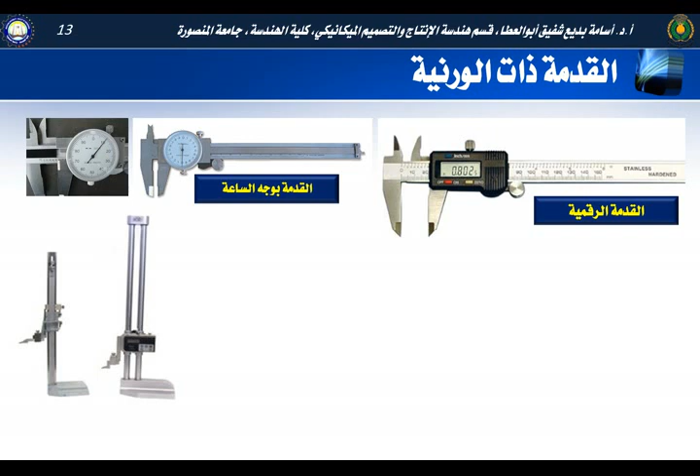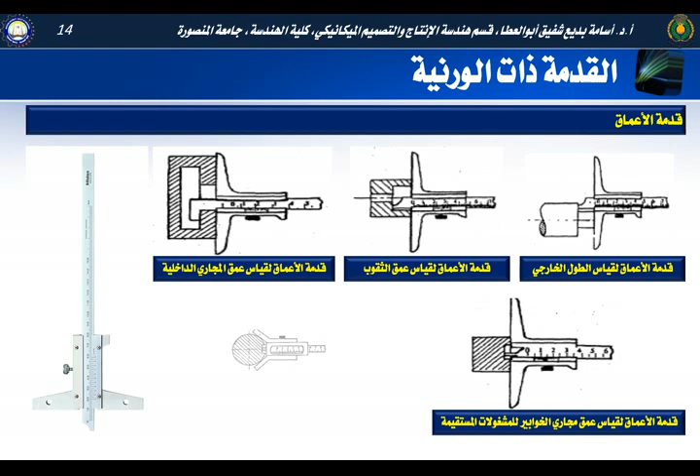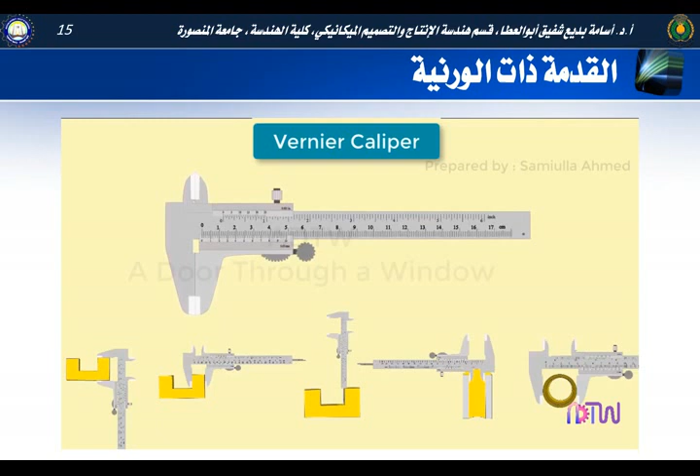Vernier caliper. In this video we will learn about vernier caliper. It is a measuring instrument which can be used to measure height, thickness, depth, and internal and external diameters of various components. It works on the principle of difference in two scales.

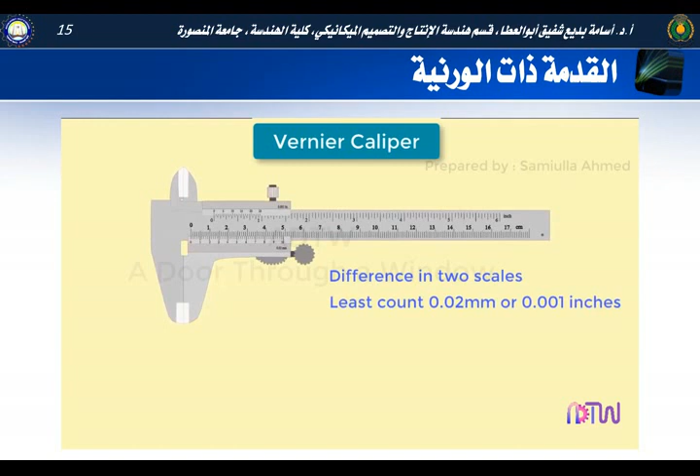It can measure dimensions accurately up to 0.02 mm or 0.001 inches, which is the least count of the vernier caliper. Let us see its various parts in detail.

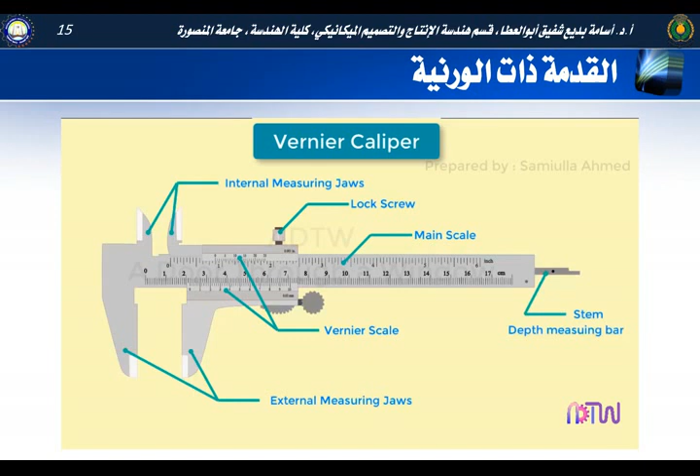It has a main scale, vernier scale, external measuring jaws, internal measuring jaws, lock screw, and depth measuring bar. The main scale has markings engraved on it: on top the markings are in inches, and on the bottom they are in mm.

The vernier scale has markings on top and bottom. The top scale is for taking readings in inches, and the bottom scale is for taking readings in millimeters.

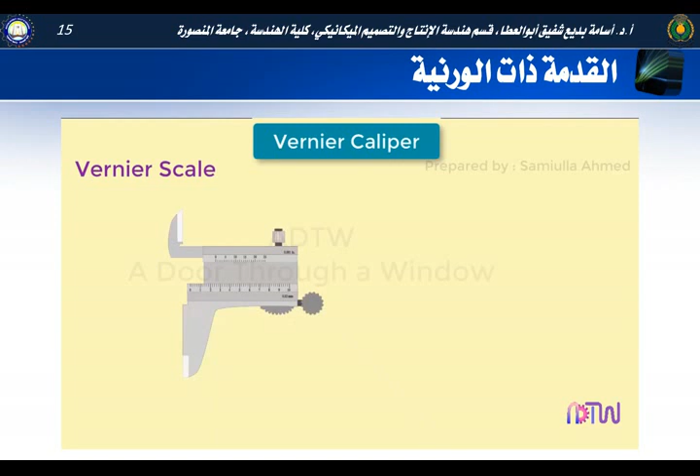There are two types of vernier scales: forward vernier and backward vernier. If on the bottom there are 50 divisions whose total length equals the length of 49 divisions on the main scale, this is called forward vernier. On the other hand, if 50 divisions on the vernier scale equal 51 divisions on the main scale, such a vernier is called backward vernier.

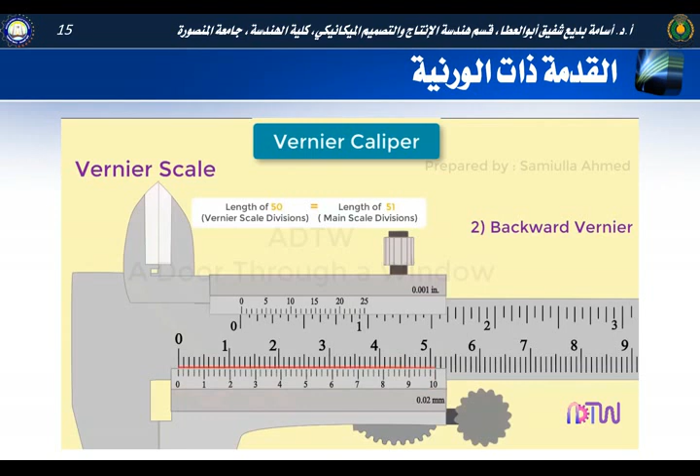In this video we will discuss the forward vernier.

External measuring jaws: there is a fixed jaw which is part of the main scale, and a sliding jaw which is attached to the vernier scale. It is called sliding jaw because it slides with the vernier scale. These jaws are used for measuring external dimensions, such as outer diameter, length, and thickness of components.

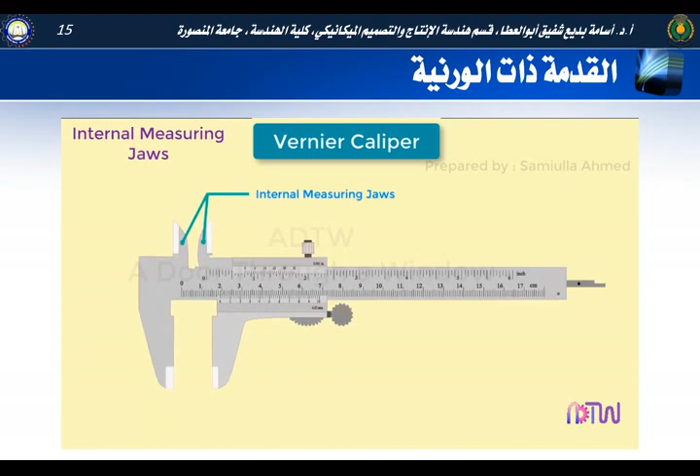Internal measuring jaws: here also there is a fixed and a sliding jaw. These jaws are used for measuring internal dimensions, such as inner diameter, slot dimensions, and distance between two parallel surfaces.

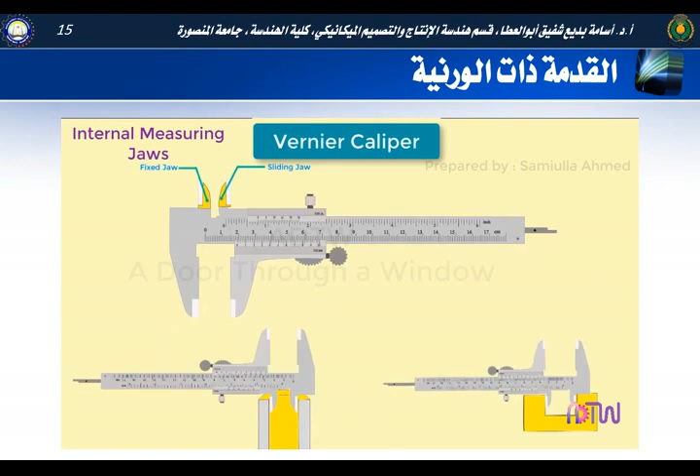Lock screw: on top of the vernier scale there is one lock screw, which helps in clamping the movable jaw in a particular position after the jaws have been set accurately over the job being measured. This arrests further motion of the movable jaw so the operator can note down the reading in a convenient position.

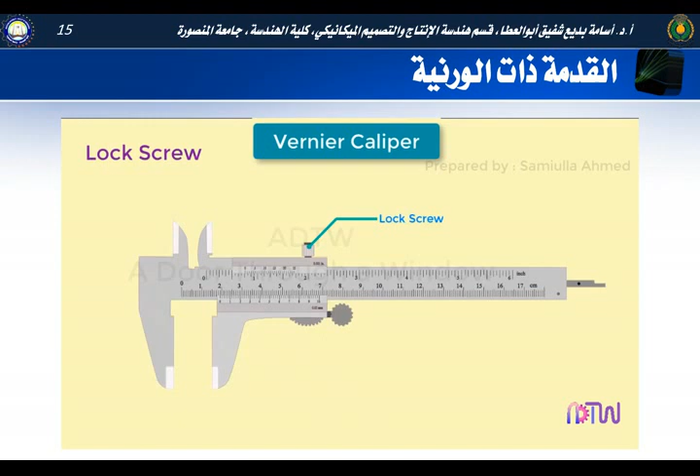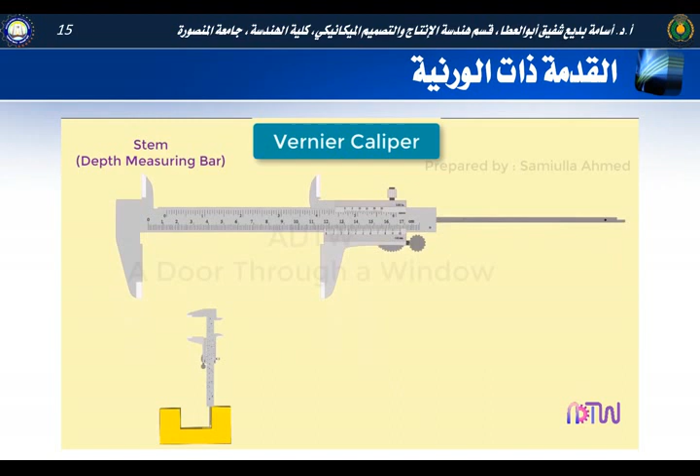Whenever the vernier slides over the main frame, a depth measuring blade also slides in and out of the beam of the caliper. This is a useful attachment for measuring depth to a high degree of accuracy.

Now let us see how the least count of the vernier instrument is calculated. As we are discussing the forward vernier scale caliper, we know that 50 divisions on the vernier scale equal 49 divisions on the main scale. Equating both.

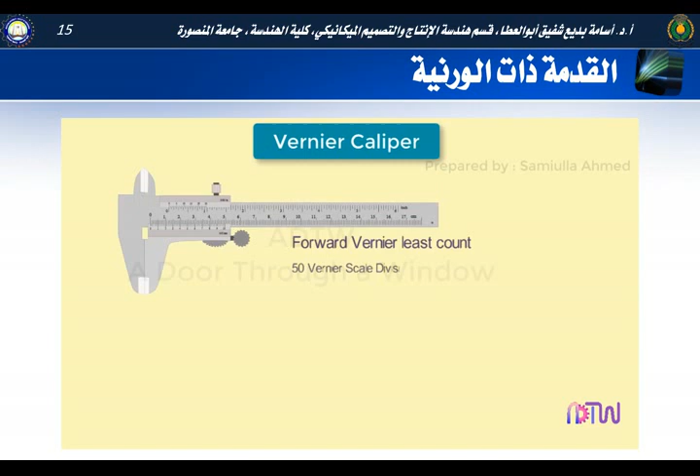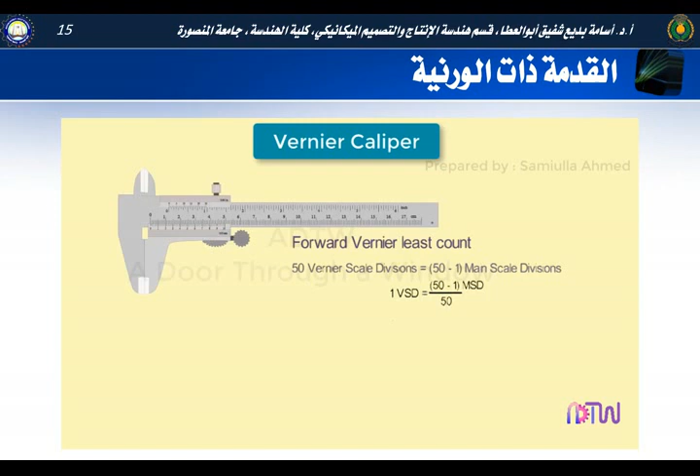50 vernier scale divisions equal 50 minus 1 main scale divisions. Therefore, 1 vernier scale division equals 50 minus 1 divided by 50, which equals 49 divided by 50 millimeters. Therefore, the least count equals 1 main scale division minus 1 vernier scale division, which equals 1 minus 49 divided by 50 millimeters, which equals 0.02 millimeters.

Therefore, the total reading will be equal to the main scale reading plus vernier scale divisions multiplied by the least count.

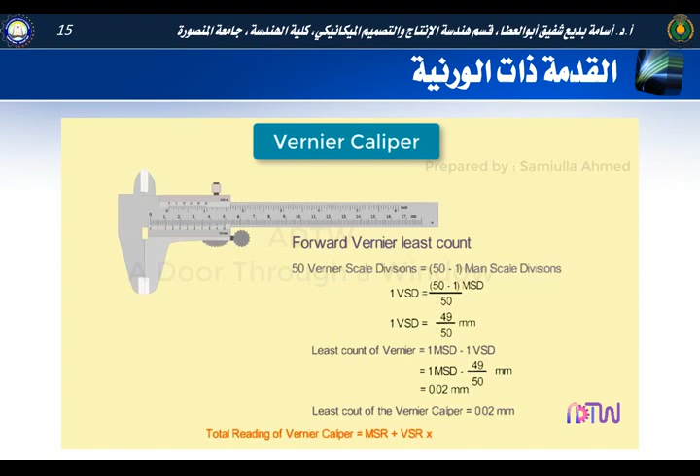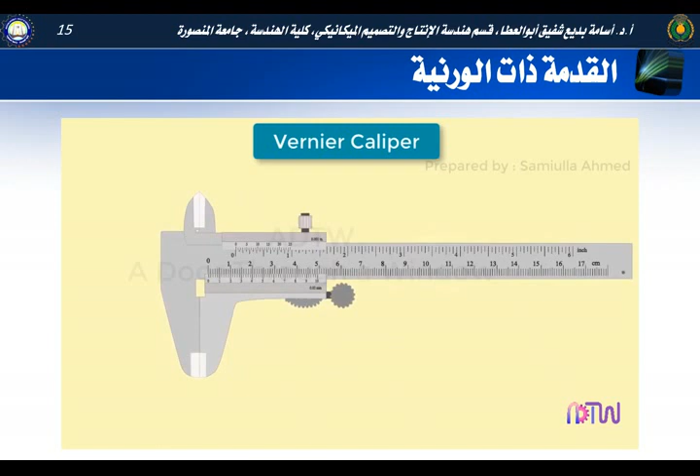Let us see how to take measurement of a component using the vernier caliper. First, completely close the vernier caliper. These are the surfaces where you can take measurements. You can also see a couple of gaps; these are not the places to take measurements.

Now let us take measurement of an object. When we hold this object between the two jaws, we first take a reading from the main scale, and we can see that 0 of the vernier scale coincides exactly with the 40th division of the main scale. In this case the size of the object is 40 millimeters. No vernier scale reading is required since the 40 mm line of the main scale coincides with 0 of the vernier scale.

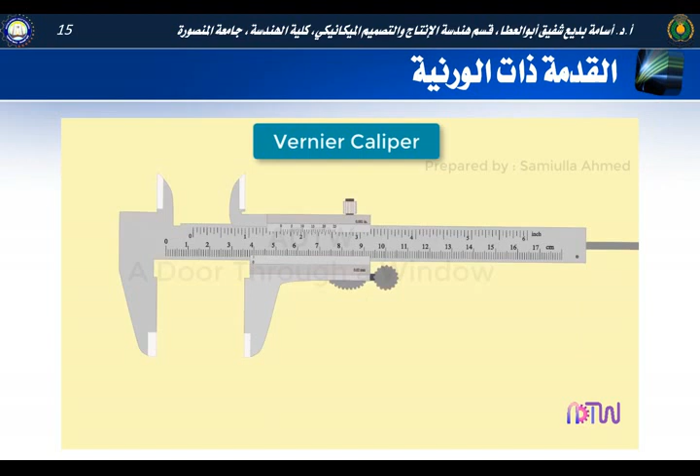Let us take another example. Again hold the object between the two jaws. In this example we can see that the size of the object is not exactly 40 millimeters; it is between 40 and 41 millimeters. In this case we require the vernier scale to get an accurate measurement.

But this time I'm only going to draw the main part of it first. Now you see the marked numbers from 0 to 10; each of these numbers represents a tenth of a millimeter. We can see one of the vernier scale mark lines up better than others.

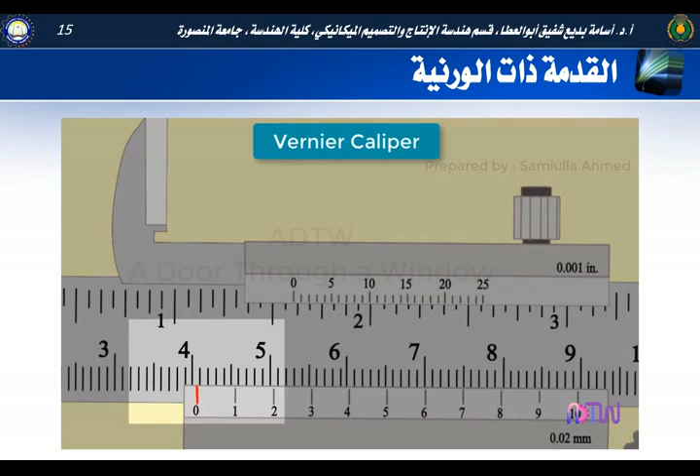Let me give you a hint where to look on the vernier scale, where a mark lines up. You see how our zero line of the vernier was more than halfway between the marks. That means the vernier scale will line up a little past halfway. Now we can see which line lines up better than the others.

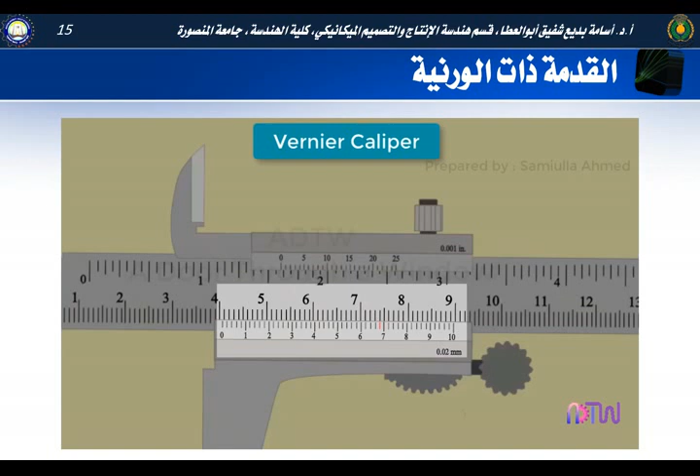Therefore, the length is main scale reading, which is 40 millimeters, plus this 0.68 millimeters, which is equal to 40.68 millimeters. If you are still confused, another easy way of measuring is to see which line of the vernier is coinciding with the main scale. Here in this case at the 34th line, therefore 34 is our vernier scale division.

And you can remember we already saw total reading is equal to main scale reading plus vernier scale reading into least count. This will give you 40.68 millimeters.

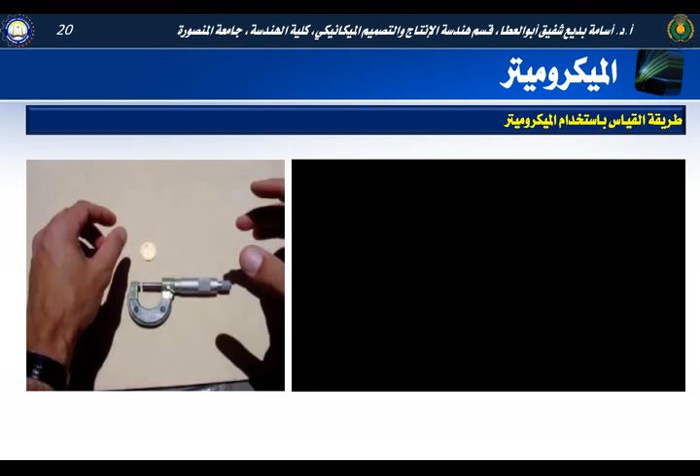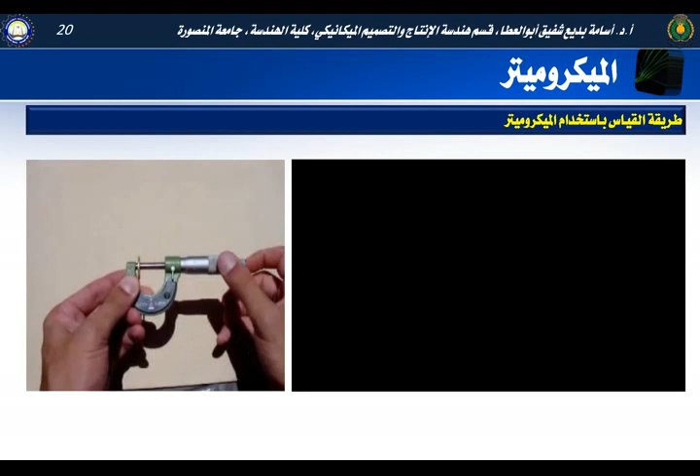Micrometers are produced in various precisions, both in metric and English units. In every case, it is the thread pitch of the spindle screw that makes each type different. The thread pitch is the distance between two adjacent thread crests.

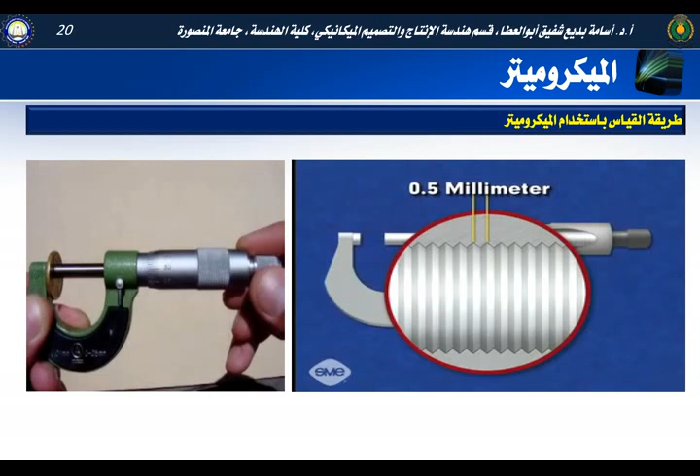In this example, the thread pitch of the micrometer spindle screw is precisely 1/2 millimeter. Each revolution of the thimble moves the micrometer spindle 1/2 millimeter.

The micrometer has a reading line on the sleeve. The vertical graduations on top of the reading line each represent a single millimeter. The vertical graduations below the reading line indicate 1/2 millimeters.

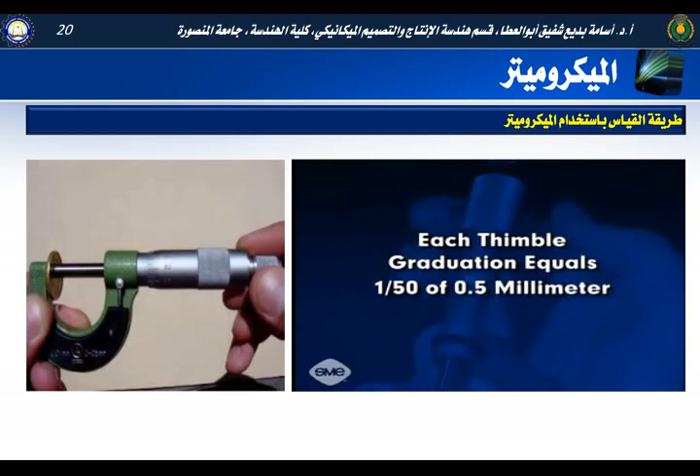The beveled edge of the thimble is graduated into 50 divisions. Since a single revolution of the thimble moves the spindle 1/2 millimeter, each thimble graduation equals 1/50th of 1/2 millimeter, or 1/100th of a millimeter.

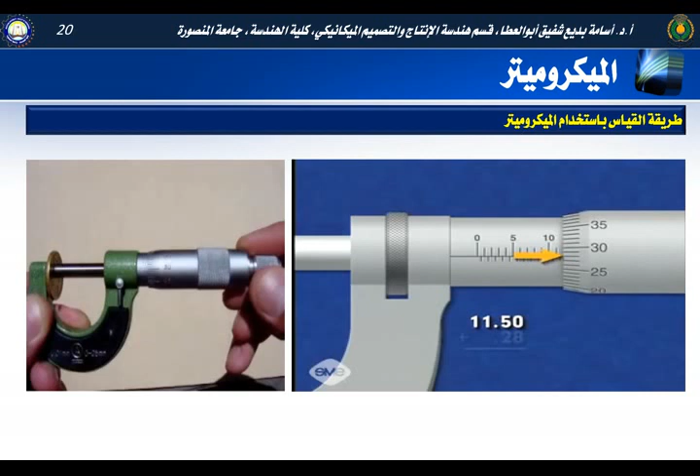The thimble is rotated and the spindle advanced until the feature is held between the anvil and the spindle face. To read this micrometer, add the number of millimeters and 1/2 millimeters visible on the sleeve to the number of hundredths of a millimeter indicated by the thimble graduation, which coincides with the reading line on the micrometer sleeve.

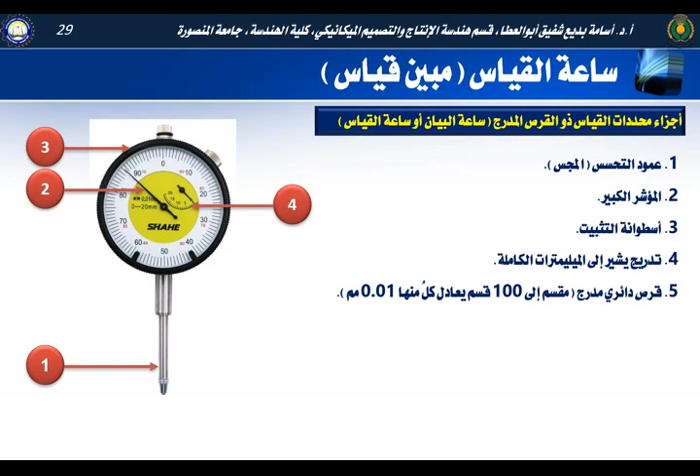Dial indicator is a very important comparator used in mechanical industrial measurement applications. In this video we'll learn about the dial indicator. This video will cover the following.

1. Working principle of dial indicator. 2. Its construction. 3. Working. 4. Applications. 5. Advantages and disadvantages.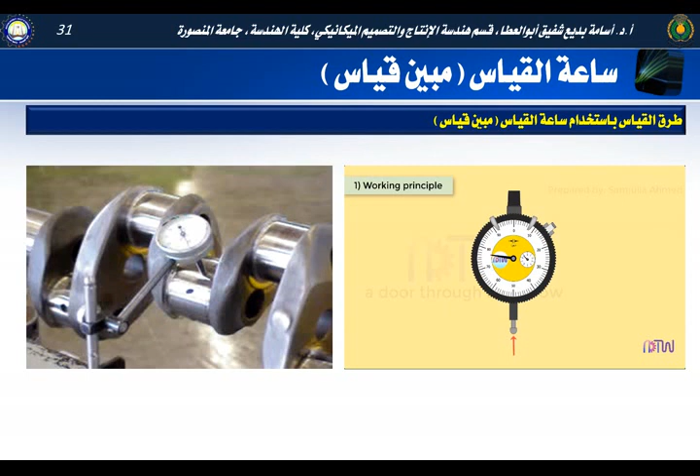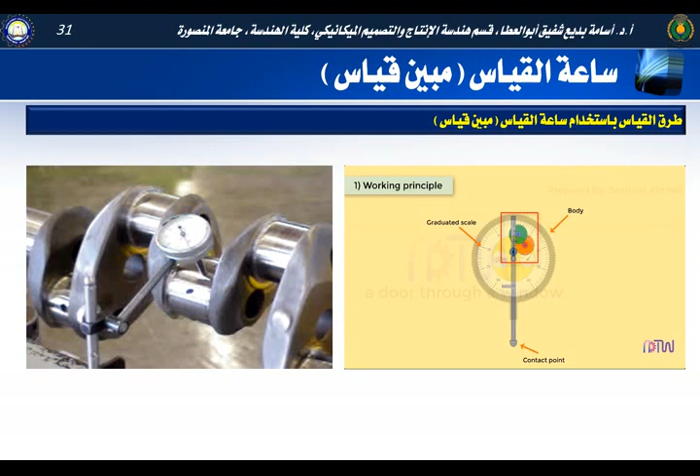Dial indicators consist of a body with a round graduated dial and a contact point which is connected with a gear train so that the pointer on the dial face magnifies and indicates the amount of plunger movement.

Construction of dial indicator. Dial gauge consists of the following parts: circular dial body, pointer or indicating hand, round graduated dial, revolution counter, bezel, bezel clamp, dust cap, stem, and plunger, which is subdivided into spindle and contact point.

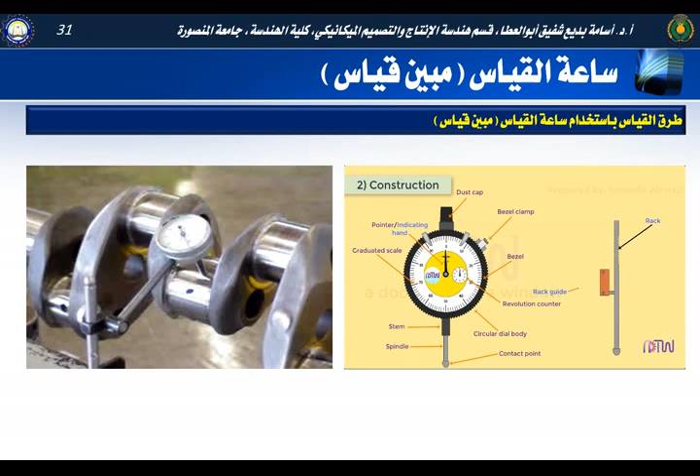In the side view we can see other parts: crystal, back, mounting lug. After opening the body of the dial indicator we can see internal parts, and those are rack, rack guide, gear train, hairspring, and coil spring.

Working of dial indicator. Before we see the working of dial indicator, let us first understand how the magnification is achieved with the help of gears.

Consider two gears A and B. These gears are meshing with each other. The number of teeth on gear A is less compared to gear B. The smaller gear A is called pinion. When we rotate the pinion by 1 revolution, gear B rotates through a small angle. This depends on the gear ratio.

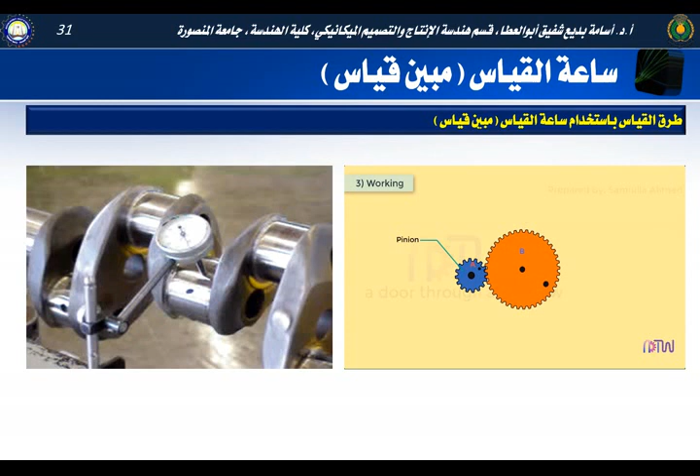Now, suppose we rotated gear B by 1 full revolution, the number of revolutions of the pinion is more. With this basic understanding, now we can see how the magnification of the plunger is achieved in the dial gauge. To obtain the necessary high magnification ratio in this instrument, a gear and pinion arrangement is used.

By arranging the gear train in a manner similar to a clock movement, there is a plunger which is a perfect sliding fit in its own bearings. This carries a rack which accurately meshes with a pinion A. The rotation of the plunger about its own axis is prevented by a pin attached to it, which is located in a slot in a rack guide.

In order to keep the plunger in an extended or normal position, a light coil spring is employed.

A small movement of the contact point causes the rack to turn the pinion A with which it is meshed. A large gear B is attached to the same spindle as pinion A. The gear B is further meshed with a pinion C, which thus magnifies the movement of pinion A.

Attached to the second pinion C is another gear D which meshes with a third pinion E, mounted on the same spindle as the indicator pointer. This magnification is further enlarged at the tip of the pointer by an amount depending upon its length.

In order to take up backlash, a light hair spring H is always fitted to the dial gauge gear trains by meshing a gear F to pinion E and attaching the spring with gear F, also to prevent gear backlash. The gears are precision cut and the movement assembly resembles that of a high-grade watch.

After final assembly, each dial gauge is thoroughly tested, checked, and properly calibrated either by a calibrated micrometer head or by the use of slip gauges.

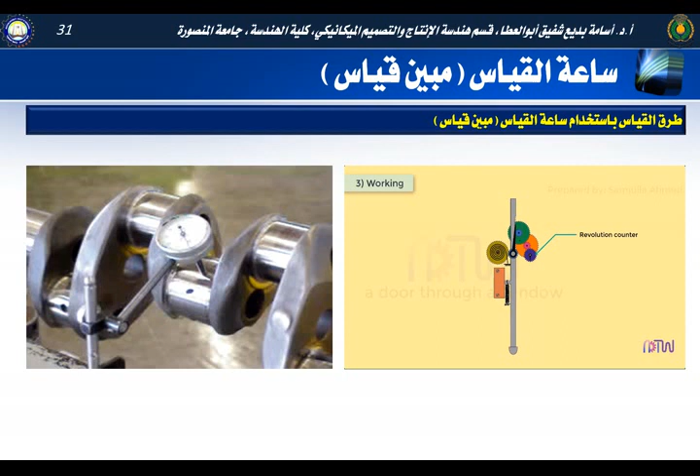If the pointer moves more than 1 revolution, a revolution counter is also incorporated, which will correctly indicate the number of revolutions made by the main pointer, thus enabling a complete reading when the gauge is used for direct measurement. Also, we can rotate the round graduated scale to set the pointer to 0.

In some dial indicators, 2 range pointers are given on the bezel, which are used to set the range.

Applications of dial indicator: 1. Comparing 2 heights or distance between narrow limits. 2. To determine errors in geometrical form such as ovality, roundness, and taper.

3. For taking accurate measurements of deformation such as tension and compression. 4. To determine positional errors of surfaces such as parallelism, squareness, and alignment.

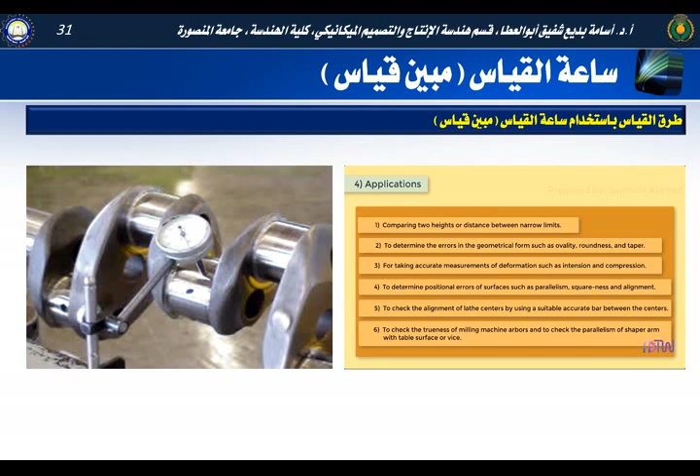5. To check the alignment of lathe centers by using a suitable accurate bar between the centers. 6. To check the trueness of milling machine arbors and to check the parallelism of shaper arm with table surface or vise. Advantages: 1. Dial indicator is the most flawless tool in taking linear measurements.

2. Moreover, dial indicators can also be used to measure several deviations by aligning with other attachments. 3. Due to small tolerances, the size of the tool is very compact and thus it can be used seamlessly in mass production.

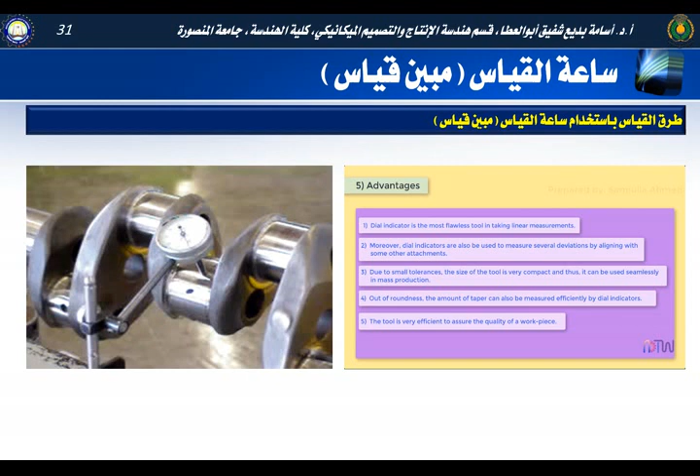4. Out of roundness, the amount of taper can also be measured efficiently by dial indicators. 5. The tool is very efficient to assure the quality of a work piece. 6. Dial indicator is also useful in dimension control.

Disadvantages of dial gauge: 1. The precision of dial indicators is often lost due to the vibration of machinery. 2. Another crucial disadvantage of the tool is the parallax effect. 3. Space constraints can lead to installing the tool at an angle, due to which precision of the measuring device is lost.

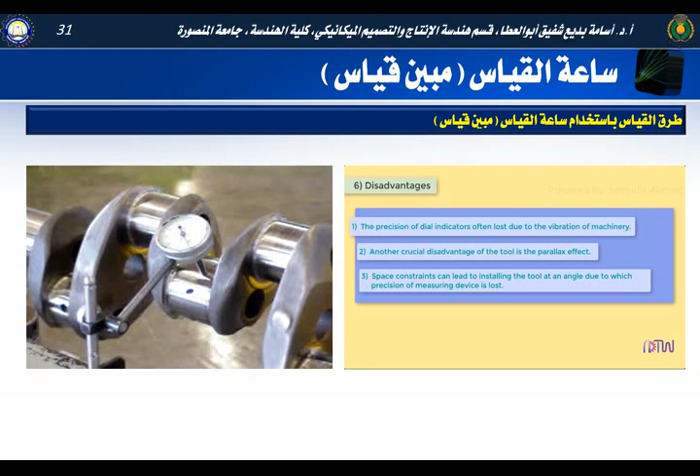Hope you have understood the dial indicator.

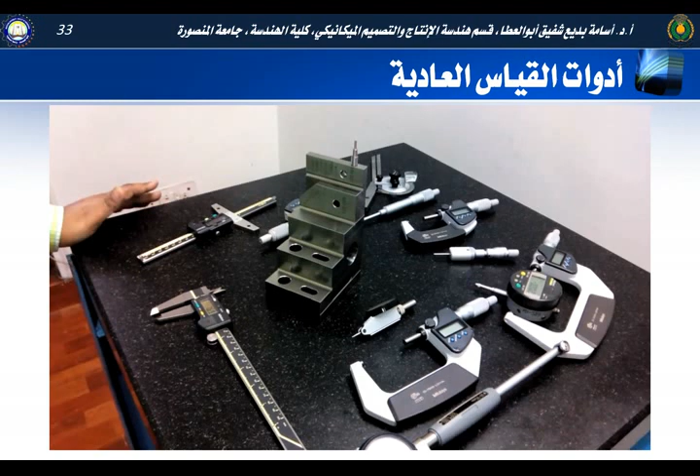Friends, now I will tell you about Type A quick check. Type A quick check looks like this.

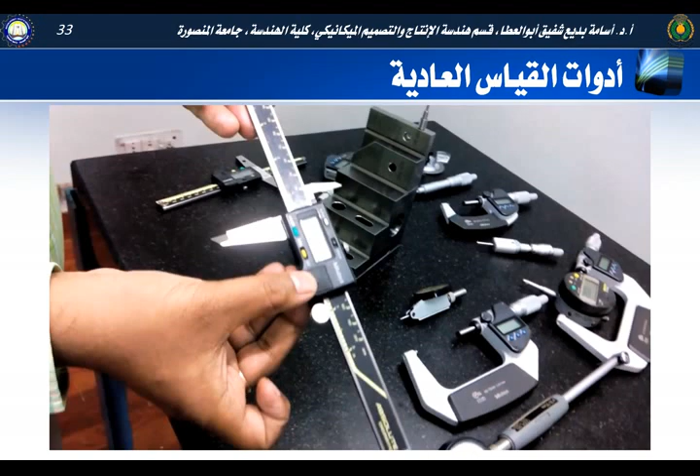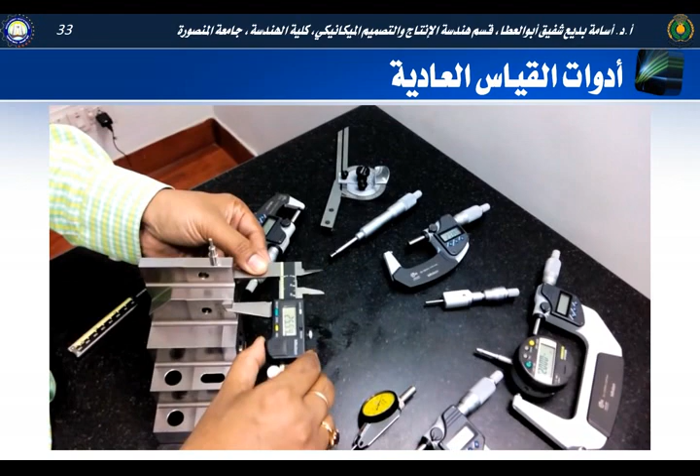Type A quick check is designed to develop skill for variable instruments. So with a vernier, anyone can develop their skill on OD jaws, ID jaws, depth bar, and step also.

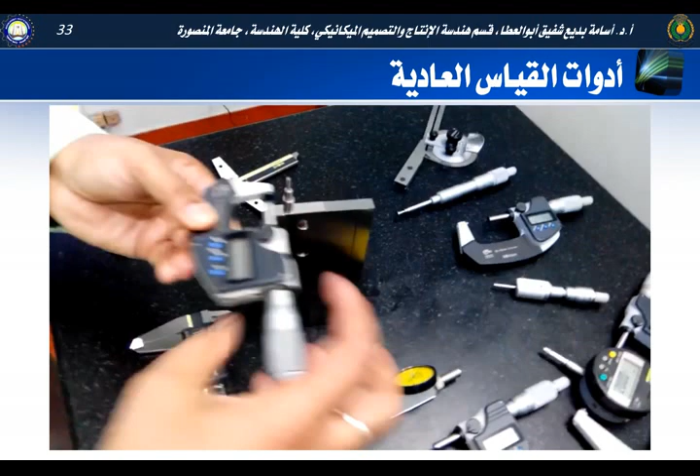You can see, similarly, you can use any kind of micrometer, and a user can develop his measurement and inspection skills in different ranges of micrometer, from small to big.

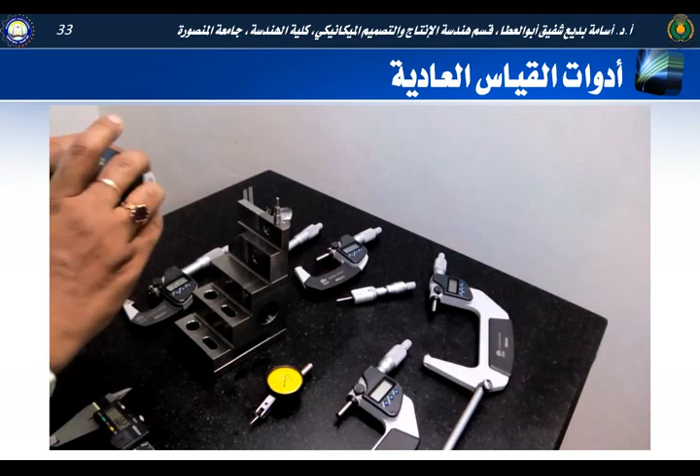For angle, you can use it like this with a bevel protractor - like this for 90 degrees, and like this for 180 degrees.

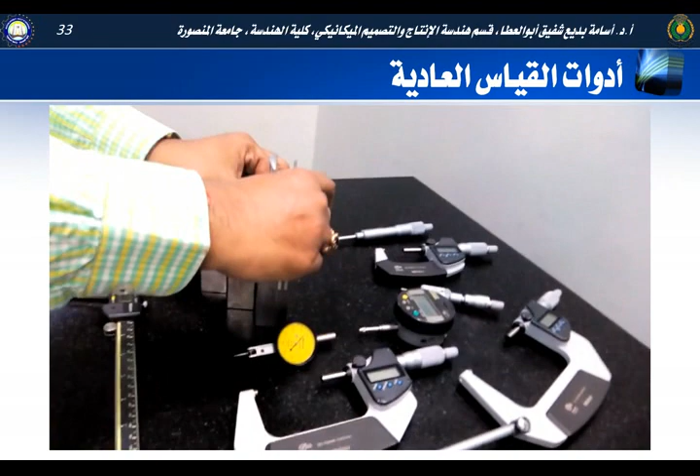So one can use and develop his skill to understand and see the difference in the measurement.

So I'll tell you once again, Type A is designed to develop skills on various measuring instruments with their different ranges, least count, type, profile, mechanical equipment, and digital equipment, and their different functions - how anyone can build their skills to check different sizes or different least counts, like this. Thank you.